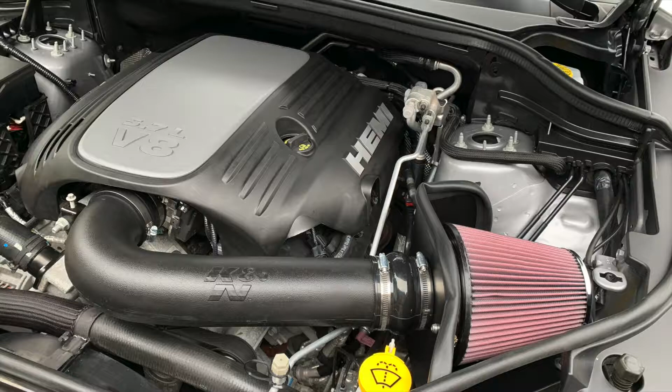So what we're looking at here is today we're going to install a K&N performance air intake system on a 2017 Dodge Durango RT. So we're just going to do an unboxing here, see what you get in the box.

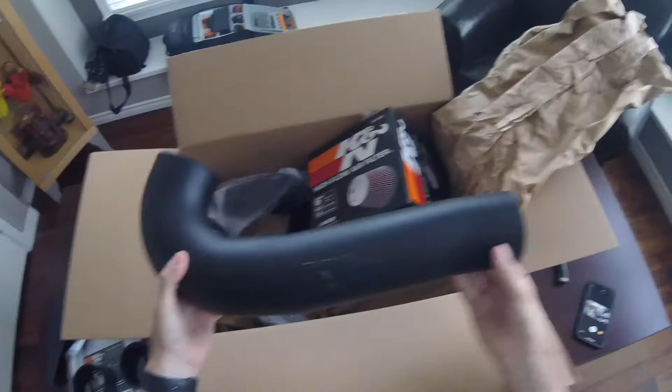So we've got some decals here, as well as some instructions. A piece of whatever that's called. One of these guys. Metal plate, we'll see where that goes. This is the long air intake tube. These are the fasteners as well as the extension for the sensor, and it looks like there's also some grommets in there as well. An extension pipe.

This is the actual air filter itself, which is rechargeable, so you don't have to replace it. You can get a kit from K&N for it. I had one of these on my previous 2007 Dodge Durango Limited. Basically what you do is vacuum them off, then they have a cleaner product that you spray on and wash off, and then there's an oil that goes on here to finish it off. So that's the filter.

This is part of the intake piece. Making a mess here. This is interesting because in other videos I've seen, this particular piece, where the filter sits, has been plastic, so it's interesting that this one is metal.

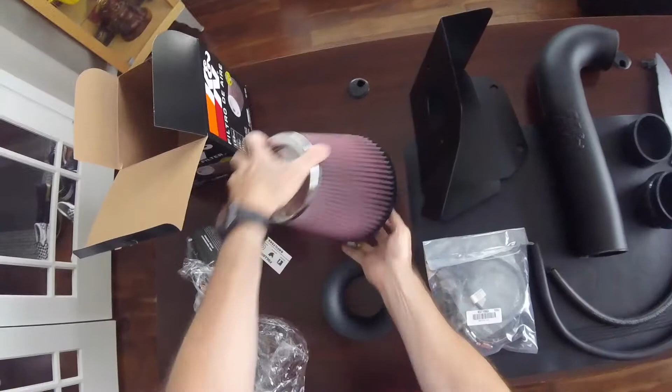I'll show you that. And so then that's our filter as well. So these are all the pieces that we need to put together.

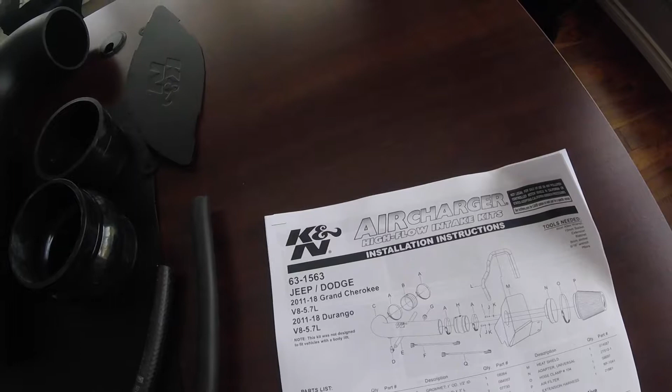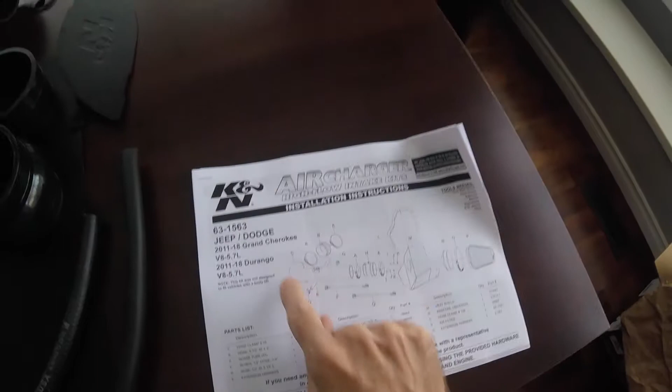I'm not sure if you can see this here, but these are the instructions. The K&N part number is 63-1563. This is going to fit a 2011 to 2018 Grand Cherokee, the 5.7 V8, and it also fits a 2011 to 2018 Durango V8 5.7 liter as well. So you can kind of see here how all of the pieces assemble together.

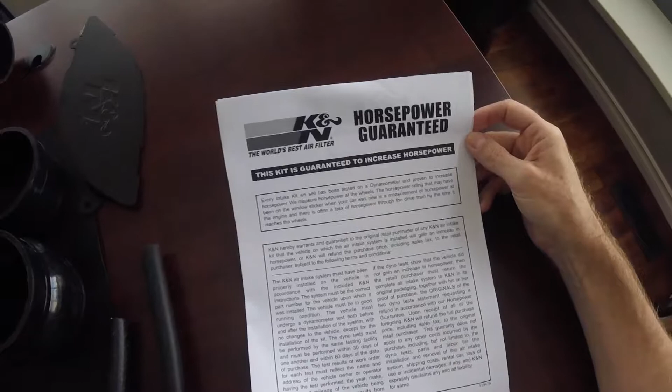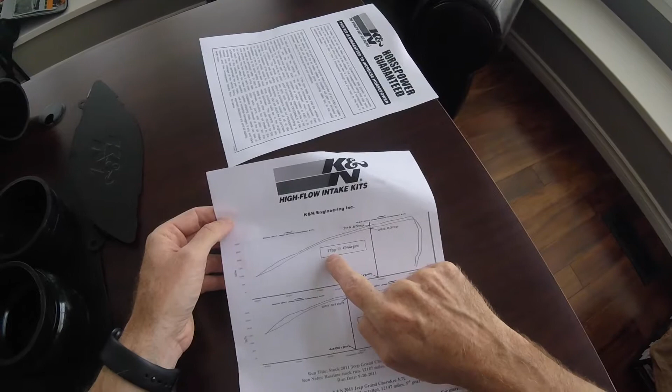So we'll take a look at the instructions and go from there. Looks like here we've got a K&N horsepower guarantee, so this kit is guaranteed to increase my horsepower. They show you here what you can expect. Looks like this is on a Grand Cherokee, I think with the same engine. You can see here that basically we can expect an additional 17 horsepower from this.

I've also heard that it makes a different sound for the engine as well. So what I'll do is, as part of this video, I'll do a demonstration of what it sounds like before and what it sounds like afterwards. But anyway, that's the guarantee there.

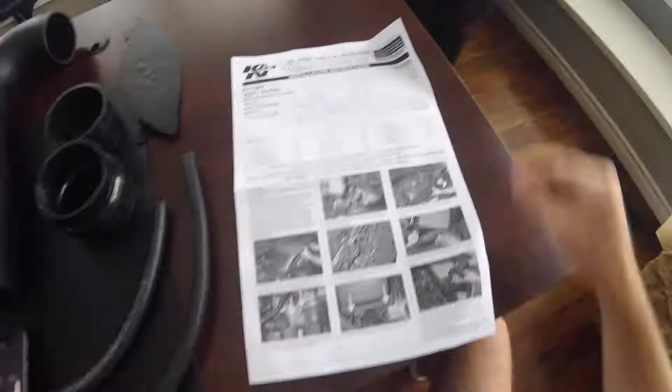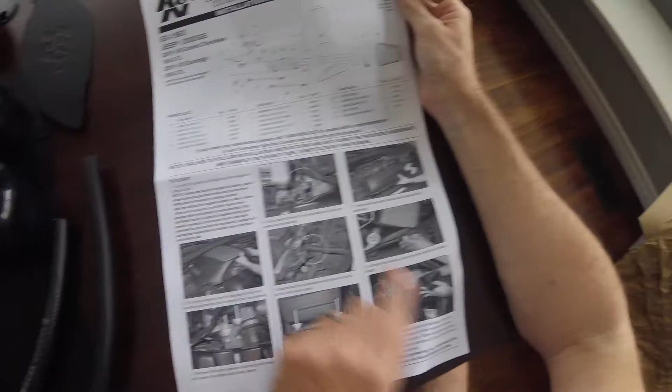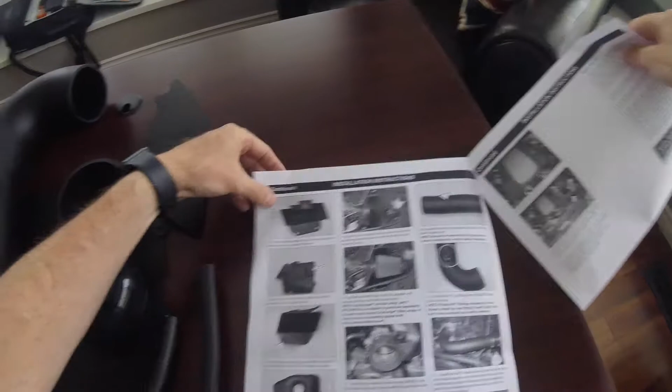The instructions themselves look pretty well laid out. They give you all the parts list, but it also explains how to remove the stock air intake and filter, with all the steps to take. And then on this side there are some installation instructions, but I'll show how to do both of these procedures when we get to the vehicle here.

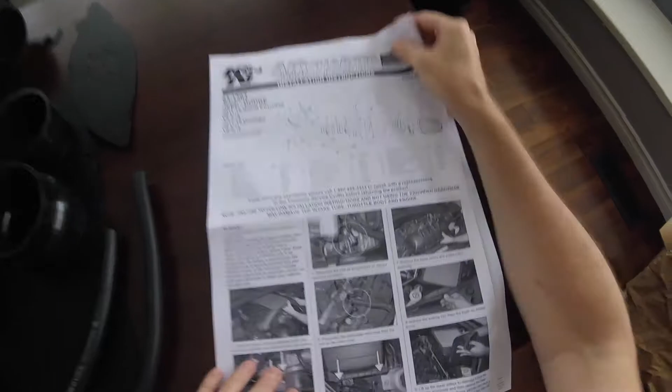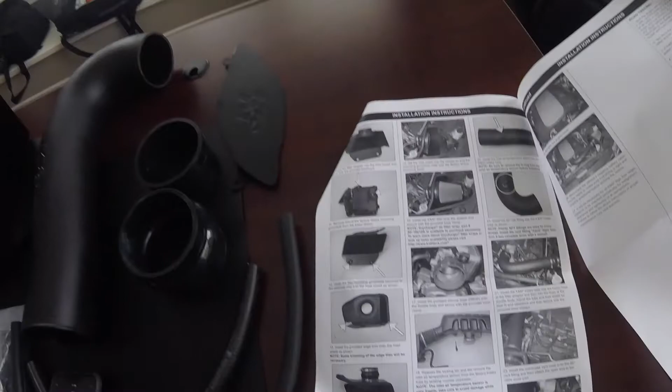But just like cooking, I like to see photos, so this will be helpful. The video itself will show you how to disassemble the OEM one and then how to install the K&N one.

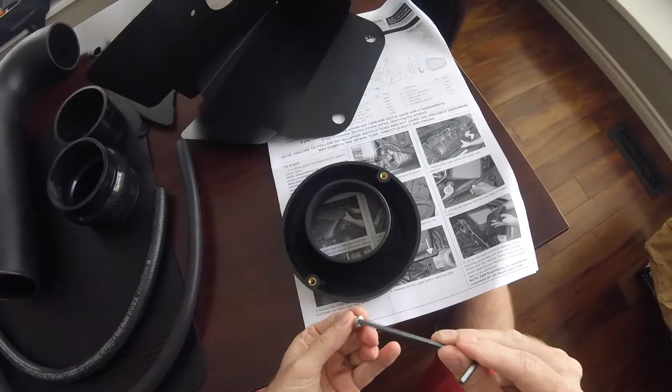So the first thing that we're going to do is install this piece here to the metal bracket. I don't know what size this is, but you'll see it's a hex bolt that needs to go in there, and so it looks like we need this washer here and then a locking nut for both. So that's those guys there. So let's get this installed.

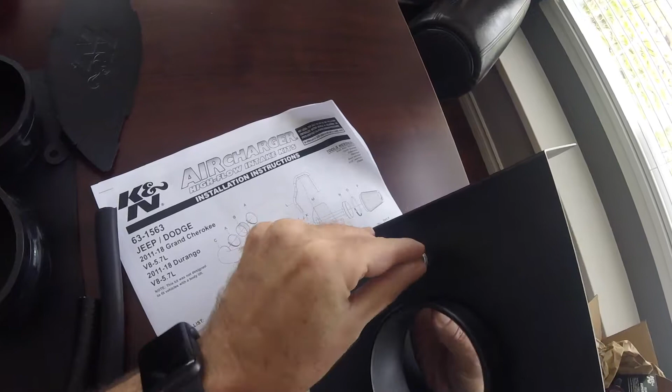So just lightly tighten both up. And then we'll get that locked.

I'm actually going to wait until this is installed in the vehicle, but basically you can see here this is the clamp that goes over here, and then the air filter itself goes in there. We'll install that once this unit is in the vehicle.

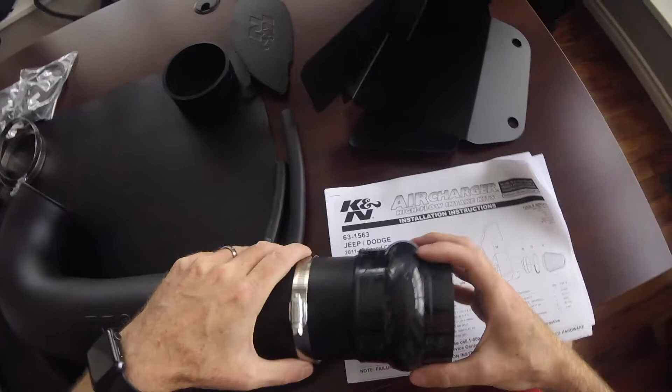So next we'll take a look at some of the piping assembly here. Looks like we need one of these guys, a clamp that's going to go here. Looks like we've got this piece that pushes on, and then another clamp that's going to go on here. I believe these are 8mm sockets, so I'll go get those in a second.

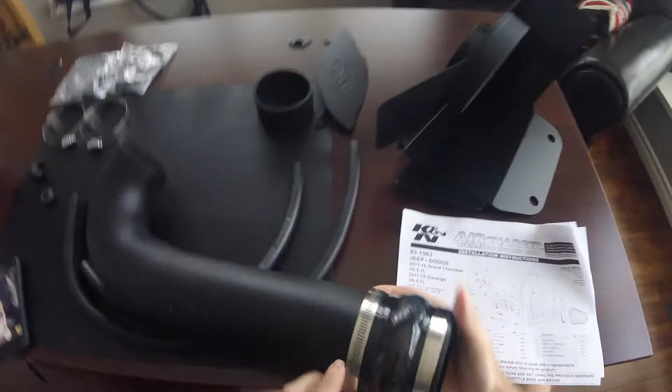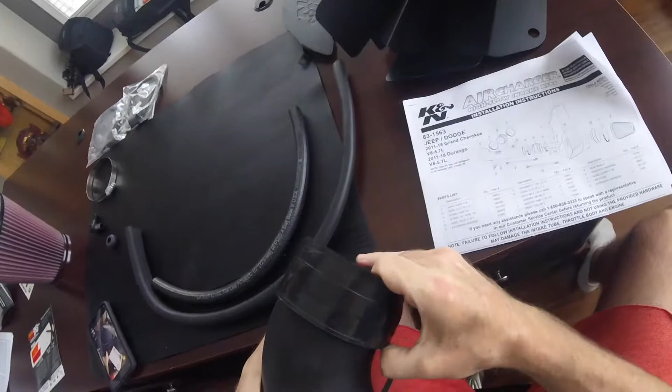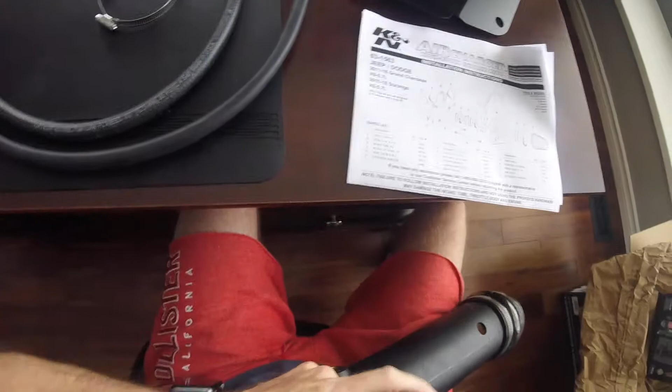So that's kind of how that goes together. I can adjust those in a sec. And then this piece here looks like it goes on the other end. Maybe on a bit too far. Let's try this a different way. Okay, that looks better.

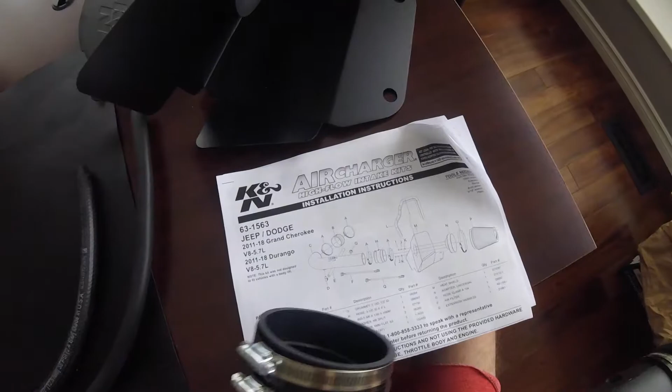So then again, another clamp that I'll adjust in a second. So I guess that's one clamp that's going to go on here, and then another clamp right here. I should probably line those screws up, and then that will go into the rest of the vehicle.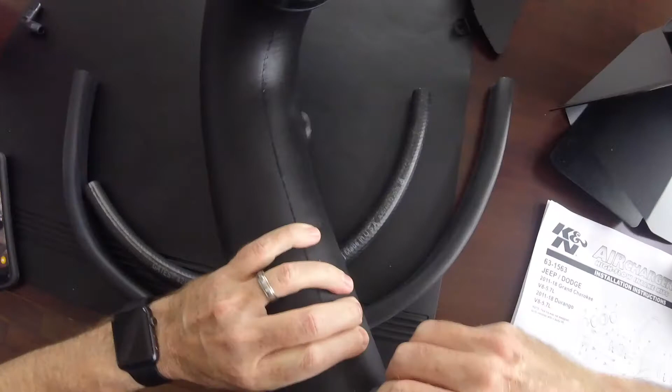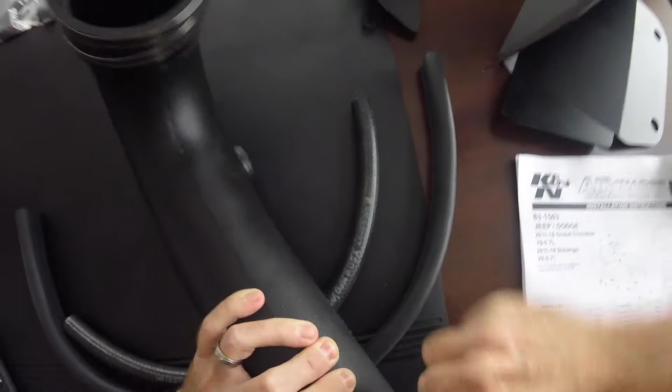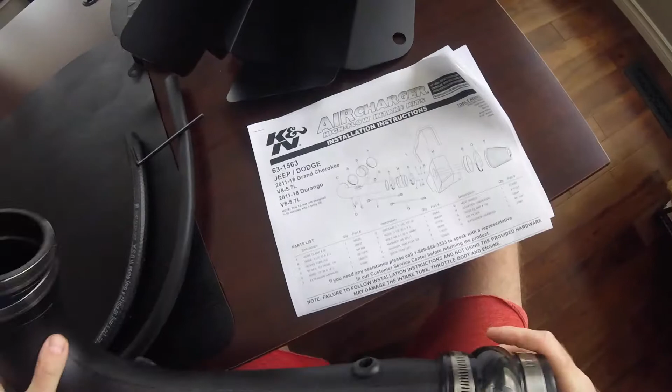There's a hole here, I believe that's where a sensor goes, so it looks like this grommet will fit in here. Okay, looks like that's in. I may just play around with that a little bit just to make sure it's in properly.

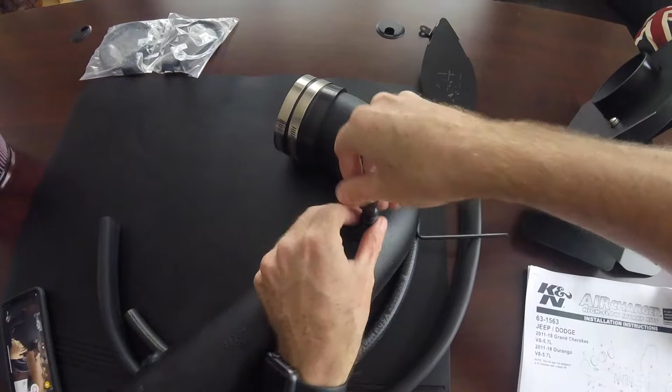And then we have this piece that goes in, screws in here. Obviously we want to be careful since this is made out of plastic, so we don't strip the thread. Just put that in for now.

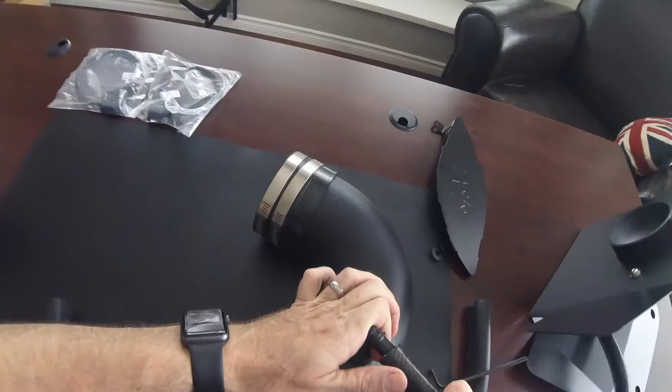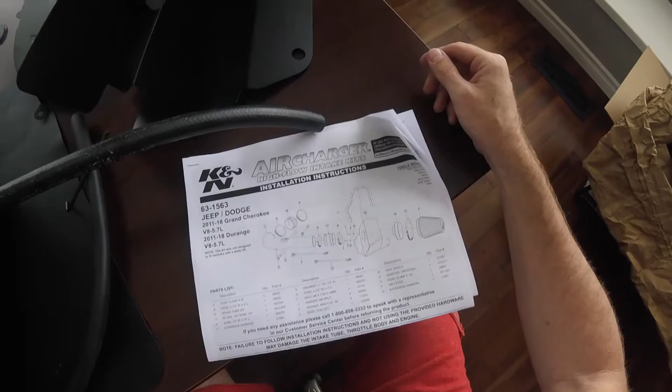And then it looks like once we get it in the vehicle, this piece is actually going to go in there like that. And then these are some extension pieces as well, I think, for some of the sensors. You actually get 2 bags of these, so we'll wait until we're actually in the vehicle to install those.

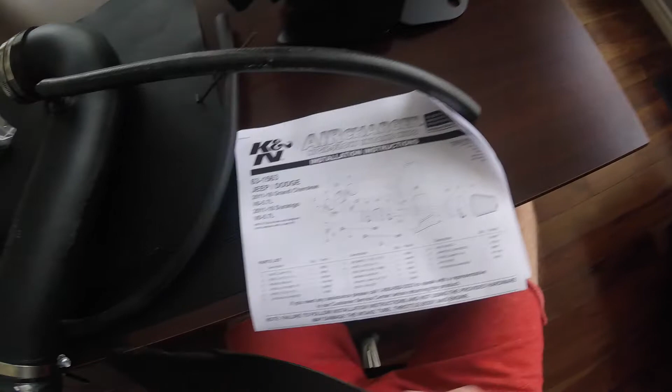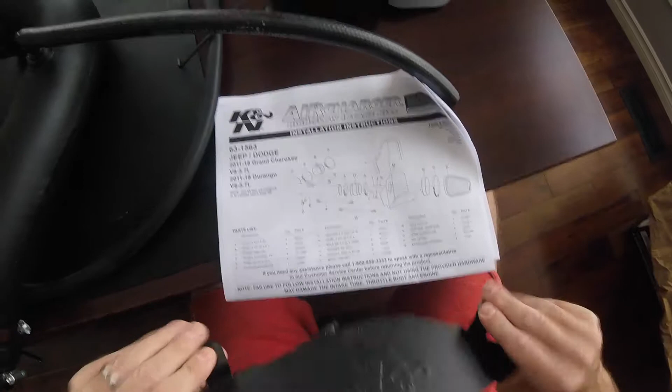And then the only thing that doesn't look evident in the instructions is this particular piece. So we'll just figure that out as we go along here. You'll see it doesn't show where that's to be installed.

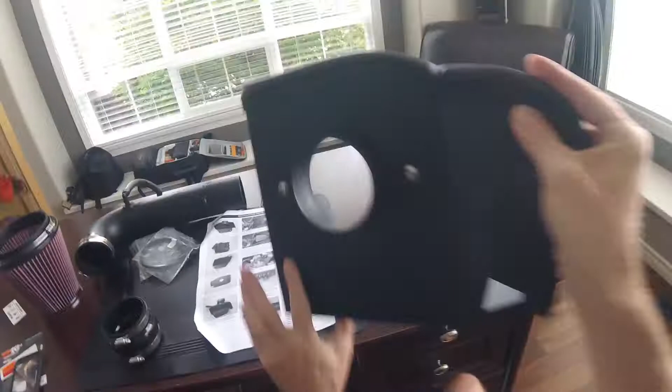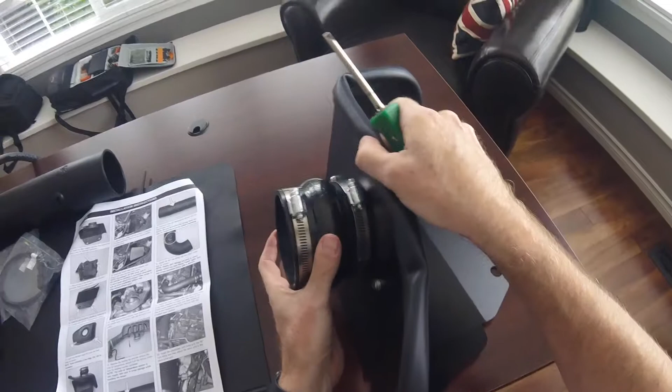Okay, looks like that fits pretty well there, goes all the way around. We can always adjust that when we get it in the truck. The other piece is we should actually be installing this on here, so I'm just going to use a screwdriver to put these on for now. It's an 8mm bolt. And then this one we'll just leave loose.

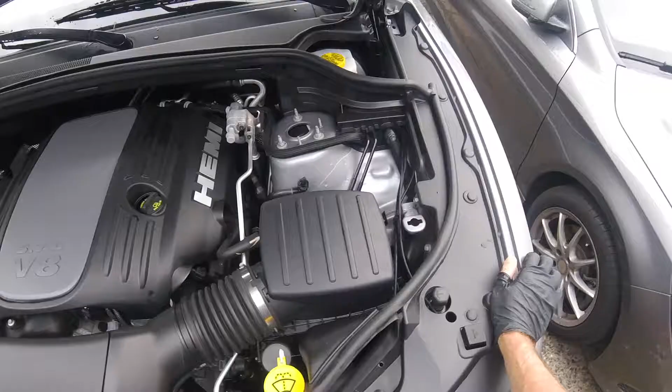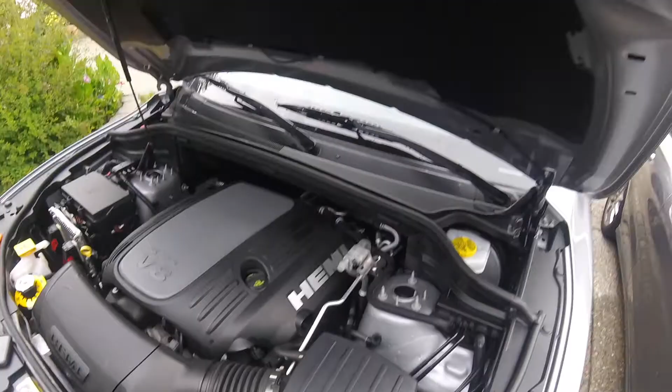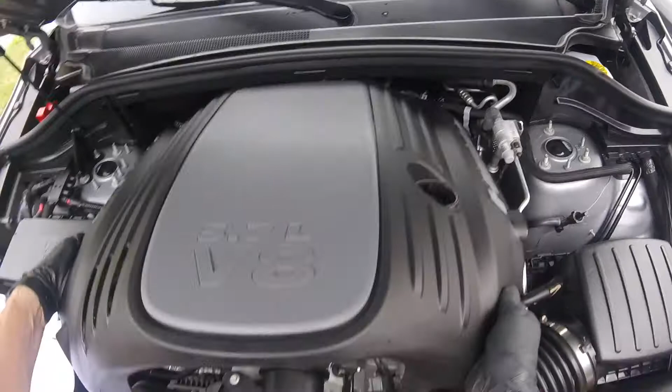Okay, so the first thing we're going to do is remove the engine cover. You'll notice that for my YouTube viewers, I did give a full engine bay detail here because I didn't want you to see a dirty engine bay. Anyway, so we'll remove this, I think it just pulls off. Yeah, and as you can see, not so clean underneath there, so we'll take care of that later.

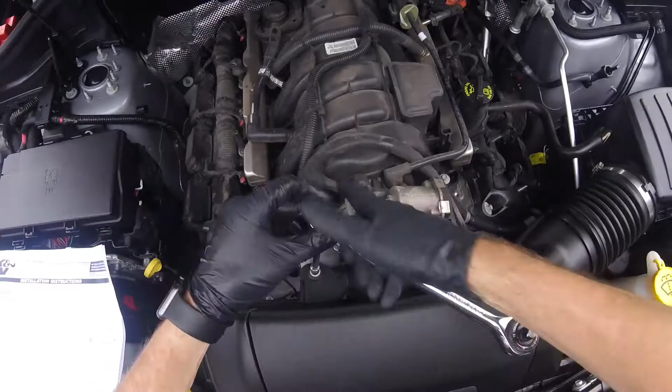Next thing we need to do is remove this bolt here, which is an 8mm. I'll just keep that aside there.

Okay, then we need to remove this sensor. I'm just going to go get a screwdriver. Okay, full disclosure, I'm not a mechanic. You don't need a screwdriver, you just need to push your finger down here, and I just had it. Just push it out, so we're going to pull that connector out. That's for the air sensor.

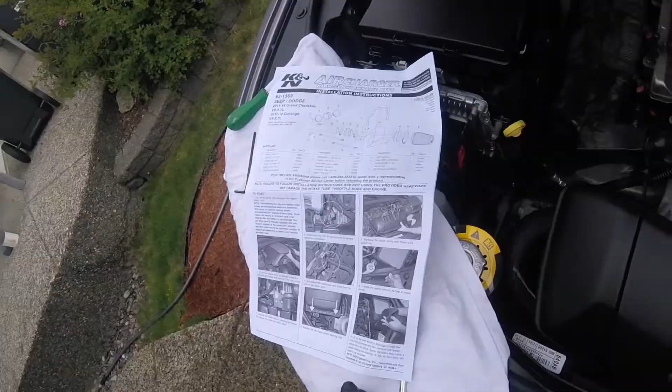Okay, now we're going to disconnect the crankcase vent hose from the valve cover. So I'm assuming that means pulling this guy out. There we go. Now we're going to release the 2 clips, one here and one here, and that should release the cover, if memory serves me correctly.

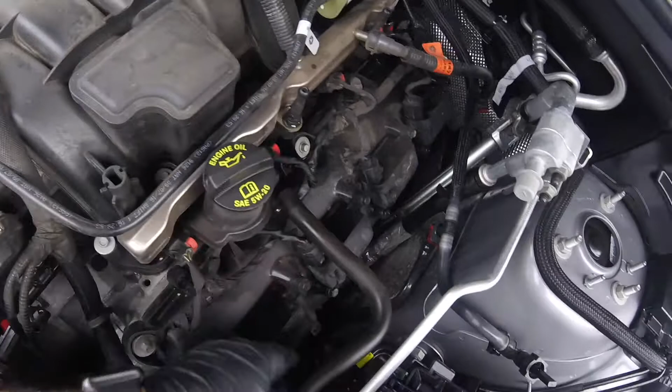Okay, so this is starting to come off. Then we're going to unhook some of the trim here, pull this guy out to release this. You can see that's the original air filter.

Then we're going to remove the upper airbox intake tube assembly. I'm going to assume we need to undo this though before we do that. And then this all just pulls out. Okay.

And then we want to dislodge this whole plastic piece here, there's just some grommets that hold it in. Okay, that seems fairly straightforward there. We need to remove 2 of these grommets. There is a third one there, but I don't think we need that, so I'll just keep that one in there.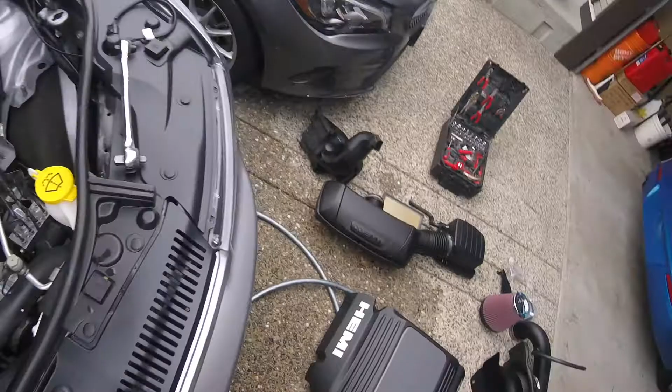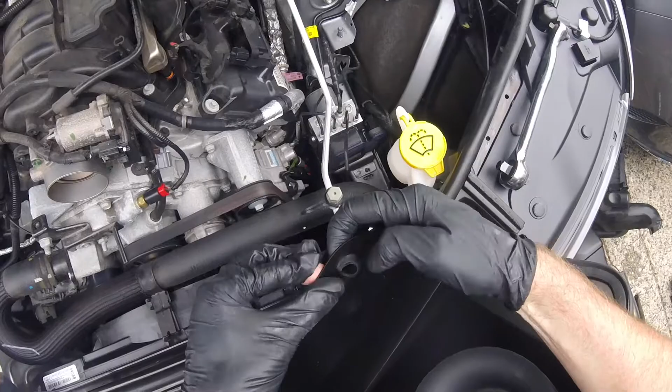Give these a little bit of a clean, and then we'll stick these old grommets back in, one in, and get the second one in here.

Okay, and I'm assuming, okay, so I'm assuming this goes in here, but because it's got to go in like that, but it looks like it's not matching up. So I think that's where this piece here may come into play. Okay, we'll be back.

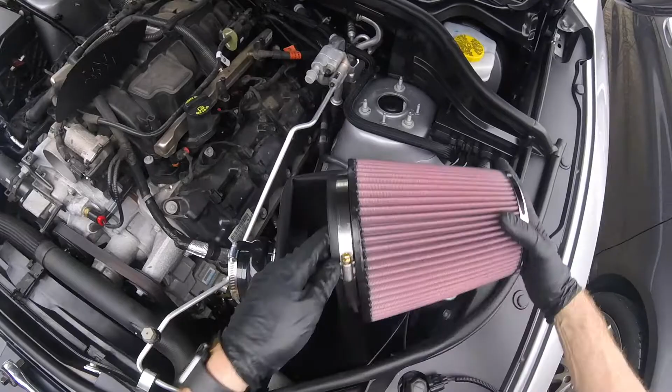Okay, correction, actually what you're going to do is install it here and here. Okay, like so. Okay, so now we're going to add the filter itself. Just tighten this up.

Okay, that's not going anywhere. Alright, next up we need to install the silicone hose provided.

I'm assuming that goes on here.

Okay, we'll take the air sensor out. You're supposed to release the locking tab, but I broke it. And then it just twists out. And then that's this guy out here, and then we can discard the rest.

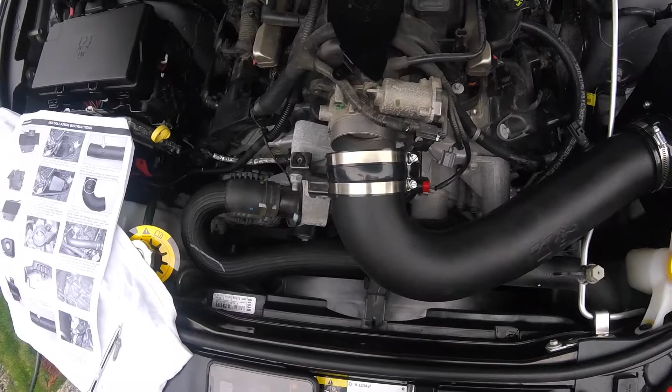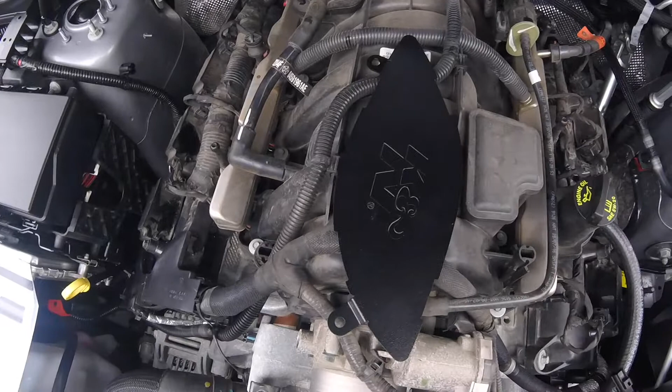Okay, so now we've got to install this to the engine, and I've already pushed this in. That's our sensor been put in. This has already been tightened, as is this one. So we'll just move that on there. And actually, I'm wondering it might be better to put this around here like this. That's nice and tight.

Okay, and we can move on to... making sure not to over tighten this. That's pretty good.

Okay, so that's solid, that's not going anywhere. Feels pretty good there, looks good here. Maybe I'll just tighten this guy up a little bit more.

Okay, so that's all solid. And then the last thing we've got to do is just hook up the sensors, which I'm assuming those extension cables that we have will help with that.

Two different types of sensor harnesses. There's this one here, which is 21680 and 21681. For the Durango, it looks like it's 21680, because if you look, that matches up, whereas of course that one doesn't. So we'll discard that one.

Try not to lose it down the air filter. And then plug this guy, I'm assuming goes in there. And then that one's in there.

Now it doesn't say to do this in the instructions, but I'm just going to go ahead and reinstall that bolt in the event I ever put the original one back in. So we'll just put that in there.

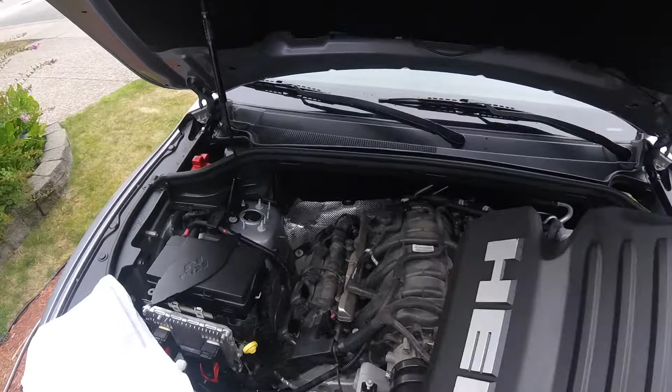So then next up, just reinstalling the cover here, cover up my messy engine. Again, my apologies.

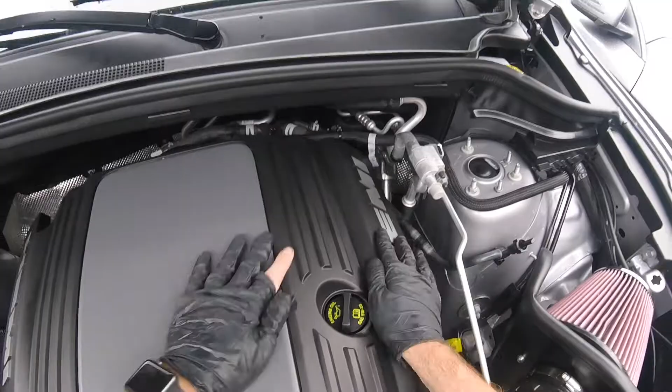Okay, so now we have the engine cover on, everything's tight, sensors connected, that all looks good, filters on nice and tight, and none of this is moving too much, so we're all good.

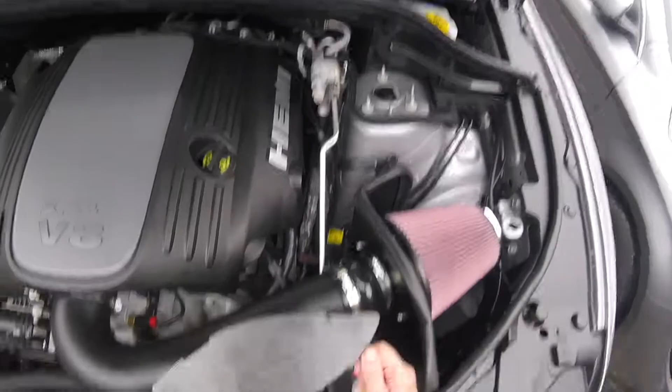Make sure we don't leave any parts. If anyone knows what the heck this piece is for, drop a line in the comments. I've got no clue, maybe it's not related to this. I'll have to research that.

So next I'm going to go get my wife, we'll start it up and see if it sounds any different. Okay, so we're going to start it up now and see if it sounds any different. Yeah, it does sound a bit different.

So the last thing that we want to do is just check that there's no check engine lights or any errors coming up. So we'll just fire up the Durango here. Of course the hood is open, so we'll still get that. And we'll just fire it up. Everything looks good there.

It sounds like inside... oh, sorry about that. It was making a bit of a cough as you let off the accelerator from when I was outside, and it does sound like it's making a bit of a whirring noise, which is kind of cool. So I hope you've enjoyed watching this video.

Full disclaimer, I am not a mechanic by trade, just a YouTube mechanic, so hopefully you found this video useful.